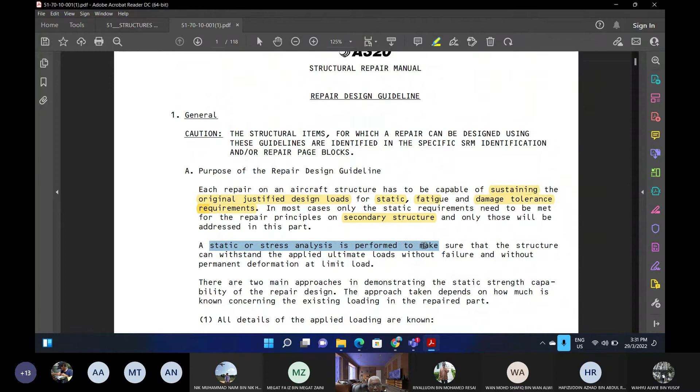A static or stress analysis is performed to make sure the structure can withstand the applied ultimate load without failure, without permanent deformation at the limit load. So first, you are required to do static stress analysis. That's why you cannot run away from it. That's why I'm trying to teach you, to give you as much information as possible, for you to have the skill or competency to do the static stress analysis, because that is required.

In fact, this is written in the manual - you have to do static or stress analysis. So that is the knowledge I'm trying to impart on you, for you to be able to do this static stress analysis.

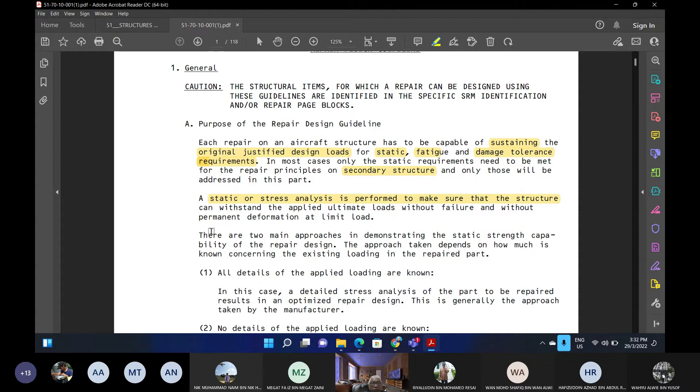There are two main approaches in demonstrating the static strength, two ways to do it. Let's go straight to the second one - this is what we call reverse engineering. Most of the time we do reverse engineering, that's the second method. The first method is where you have access to the OEM, and you have all the information on the load that goes through each structure. Then you are doing the first approach.

Meaning detail of the applied loads are known. You know how many Newtons go through each member - the skin, the stiffener, the bulkhead, the frame - in fact, every fastener, you also know the load. So the loading is known.

In this case, detailed stress analysis of the part to be repaired results in an optimized repair design. Because you know the load, you're not guessing - you know exactly what goes into that, and then your repair ends up being optimized.

Generally, this approach is taken by the manufacturer. You are at the level of manufacturer, because the manufacturer will have what they call a stress manual, and that stress manual will give all the detail about each structure - loads, stress, factor of safety, margin of safety.

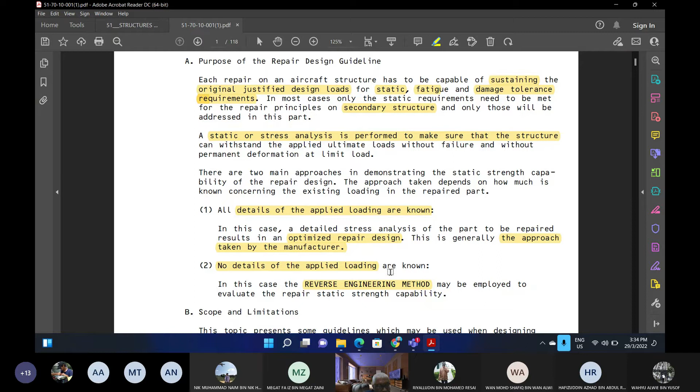Most of the time, there's no detail of the applied load. We do not know. We just look at the aircraft, we just look at the structure. We have no idea what the load is that's going through the structure. That happens all the time when we operate or own the aircraft. We were not the OEM, we have no access to the OEM. OEM will give you access to the structure repair manual, but they don't give you access to the stress manual.

Unless you're a very big airline, for example a big airline in the US like American Airlines, with thousands of aircraft, then they may have access. The OEM will share that information because they have too many people to handle, so they let the airline work on themselves and give them the information.

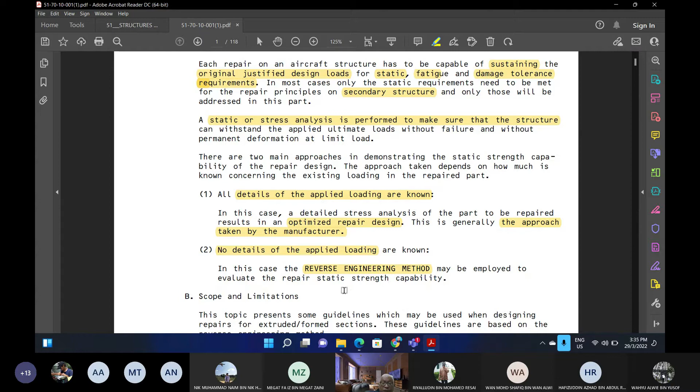So we do reverse engineering. We do not have the load, so we have to do reverse engineering. We will talk about it later.

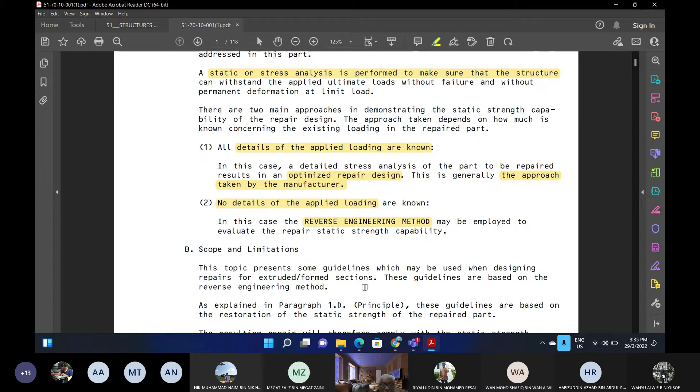Scope and limitation: this topic presents guidelines for designing repairs for extruded and formed sections. The guidelines are based on the reverse engineering method. This will explain how to do repair on extrusion or formed sections, not just skin sections, completely. Remember, aircraft structure is very simple.

Either you have skin or you have angle. Skin and angle put together can become a spar, a frame, or a bulkhead. That's how simple the concept is. So structure repair design can also be very simple: either a doubler or patch for the skin, and a splice doubler for the extrusion and form section.

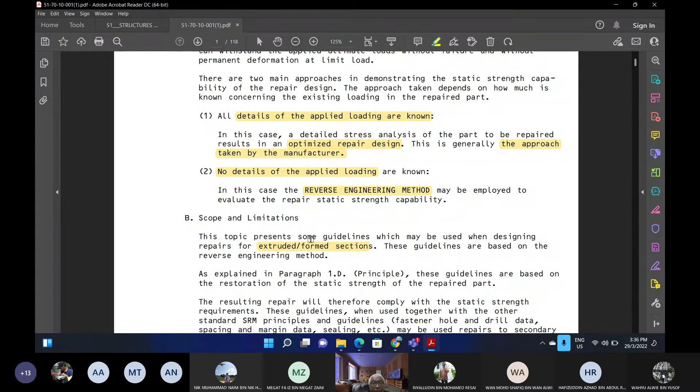The repair is meant to restore static strength. The resulting repair should therefore comply with the static strength requirement. This guideline, when used together with other standard SRM principles and guidelines for fastener holes, drill data, spacing, margin, and sealing, may be used to repair secondary structure without referring back to Airbus.

So you use this guideline coupled with other manuals for each task - drilling, installing fasteners, margins of safety, margin data, sealing, all the details you follow. This guideline plus that information together becomes the engineering order to repair, and that can be approved on secondary structure without going back to Airbus.

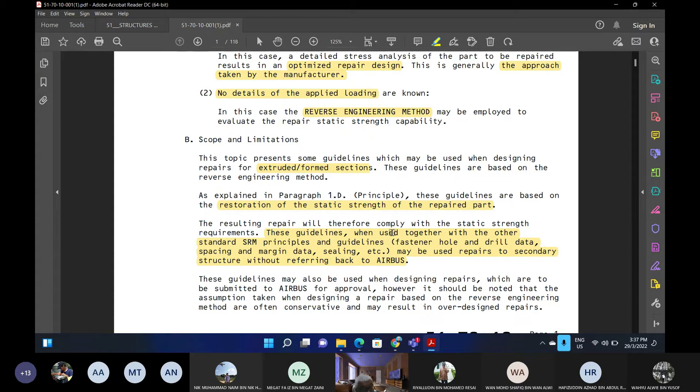In Malaysia, the CA will give you approval to do this. You'll be Part 21 Sub Part J, Design Organization Approval, and you'll have this approval to approve your own repair design on secondary structure. So you don't have to go back to the OEM, you don't need to wait for them to send out that repair approval.

This guideline is also used when designing repairs that are to be submitted to Airbus. If you submit to Airbus for them to assess your repair, for them to be able to review the repair easily - because you already used the principles they put in - you will have less time for them to approve your repair proposal.

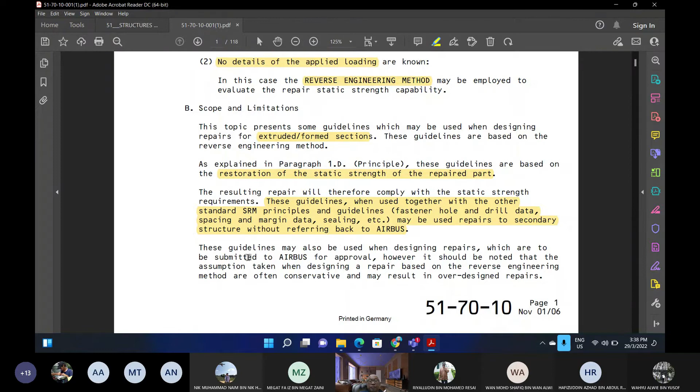Any question? So far no, sir. Okay.

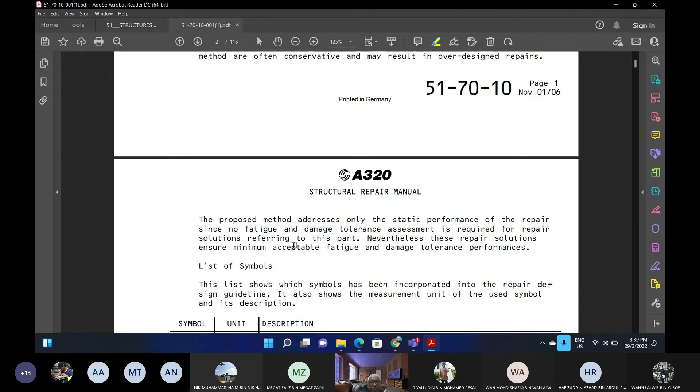Even though they are not focused on fatigue and damage tolerance, more focused on static, the general guideline of cutting, drilling, machining - all that methodology for you to make doublers, to make fillers, to cut the damage area - you have to follow this manual. This manual already has built-in damage, fatigue, and damage tolerant principles in that kind of activity.

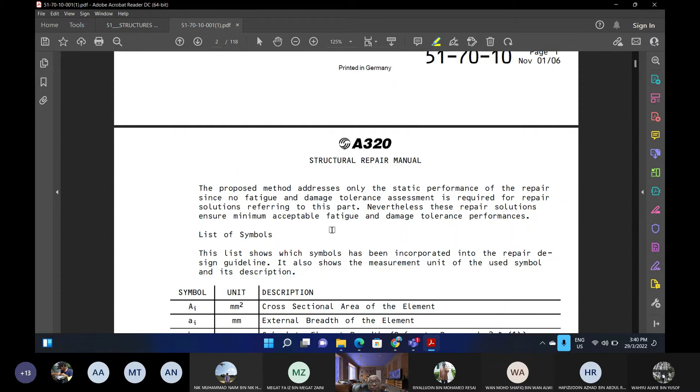That's why we have shot peening, heat treatment, hydrogen embrittlement. Those are elements for you not to fail prematurely because of fatigue and damage tolerance. And then next you can see the list of symbols.

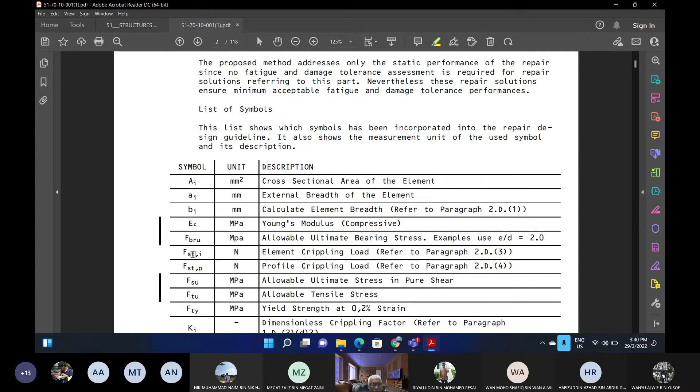This is engineering properties, material values. We have to see here FBRU, FST, FSU, FTU, FTY. This is something you always see when you do mechanical material, so this appears again - like I said, you cannot forget them.

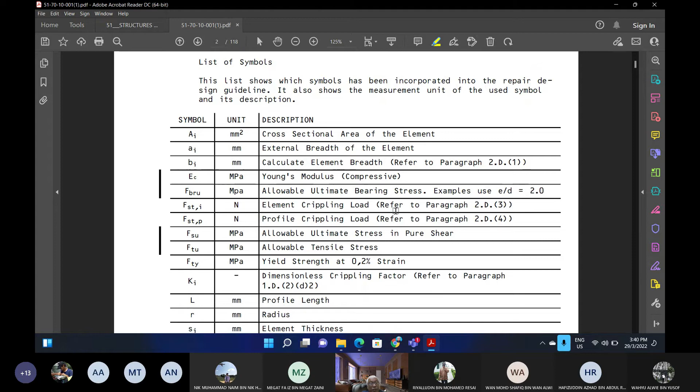You will see this again in this manual. So whoever is now doing mechanical material - I think it's too late for some of you - hopefully you'll be motivated seeing this, because whatever you do actually appears in the aircraft manual.

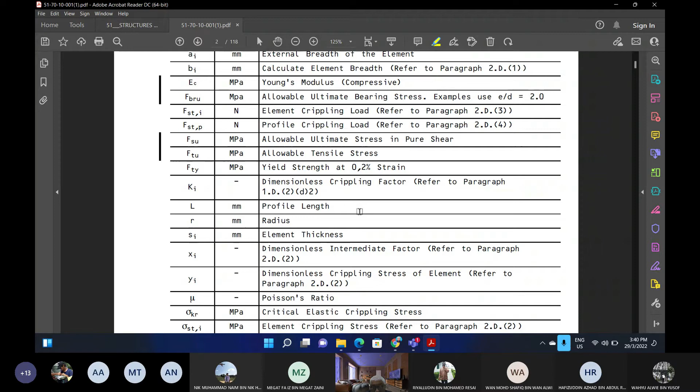And then there's a term here, factor of safety. We have reserve factor, we have margin of safety. Factor of safety is purely for certification. Any primary structure should have a 1.5 factor of safety, meaning 50% extra in terms of strength. So if you design something to 150 Newton, you only apply 100 Newton, you have 50 Newton extra margin. That margin will be able to handle errors, environmental issues, or any overload or unexpected operational load.

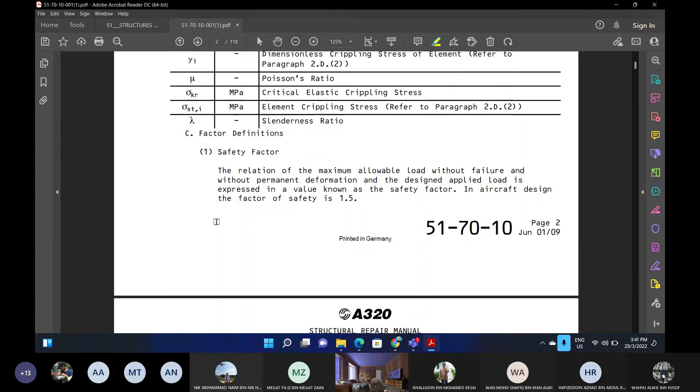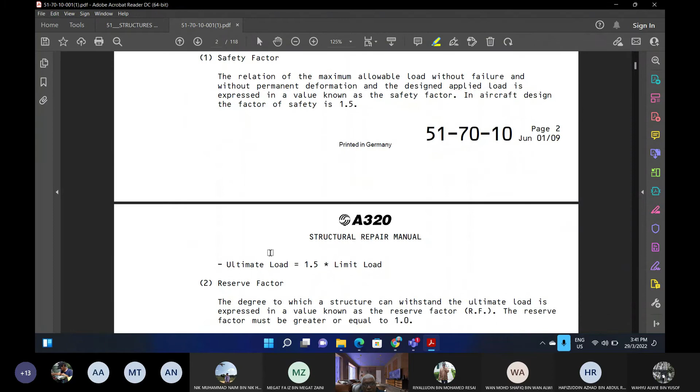Then there's another term, we call it reserve factor. Reserve factor is the allowable load divided by the applied load. So if the allowable load is 150 and the applied load is 100, you have a reserve factor of more than one.

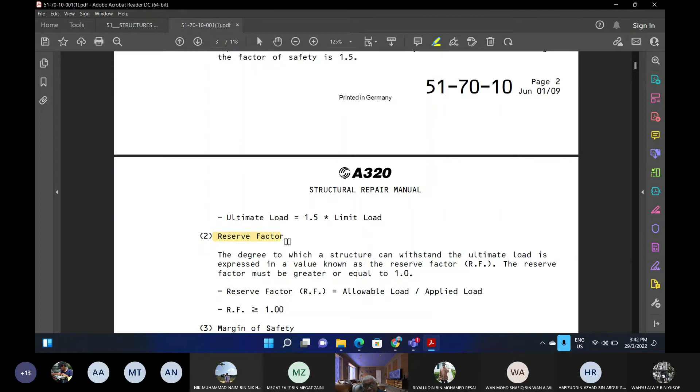So you may only work on a primary structure to require 1.5. For secondary structure, fairing is something not critical. You may use less than 1.5. So if you say your allowable load you design to 110, you apply at 100, so 110 over 100, you got 1.1. So it's more than 1, so it's acceptable. Should not be less than 1. That is reserve factor. Means you still have some reserve load in the structure.

Margin of safety is reserve factor minus 1. Should be more than 0. So say you have 110 as allowable load, apply at 100, you got 1.1. You minus 1, you got 0.1, so still okay because it's positive. It's higher than 0. So it's three terms always been used.

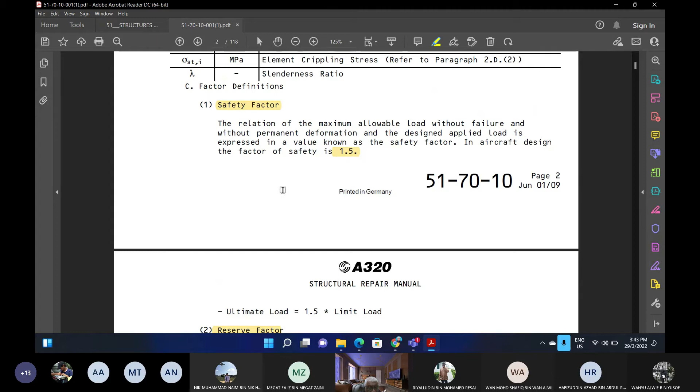And first term is regulatory term. So this is used when you want to do certification. You must have the factor 1.5, especially for the primary structure. Okay. Any questions so far?

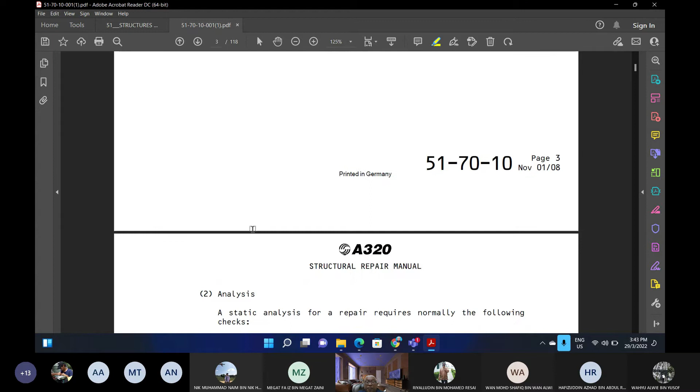Okay, next: repair material and dimension. In order to restore, remember, repair, restore. A basic principle when reinforcing and splicing is to use the same, remember, same material as the original. First rule. So if your original material is 2024 T3, your doubler should be 2024 T3.

Okay. General principle. If you are unable to get the doubler, you go back to the manual, you look for substitution. What can you substitute? What are the materials to substitute 2024 T3? If not there, then you have to use reverse engineering, and then you have to justify. If you have everything in the table from the manual, you don't have to justify. You just refer to the manual. If not, then you have to justify yourself.

The worst, you may be required to do testing. So that's why most of the time we just follow the manual. We just follow what are the allowable substitutions, so easier for us. So same material. Yeah. Then thickness of the repair part shall ensure the cross-section area of the repair restores the original cross-section area. Okay. Shall be ensured.

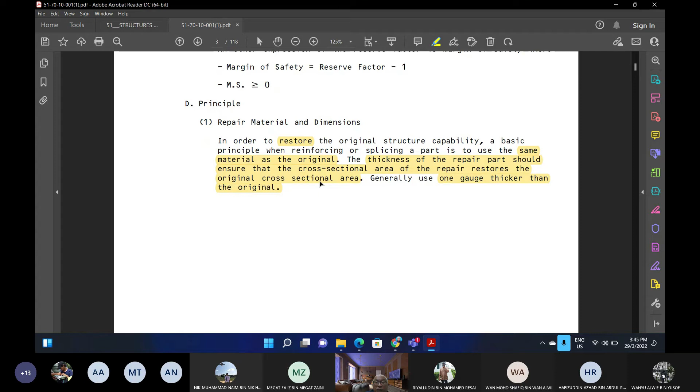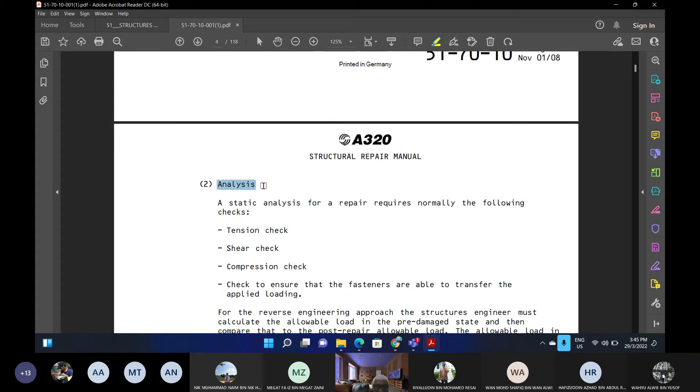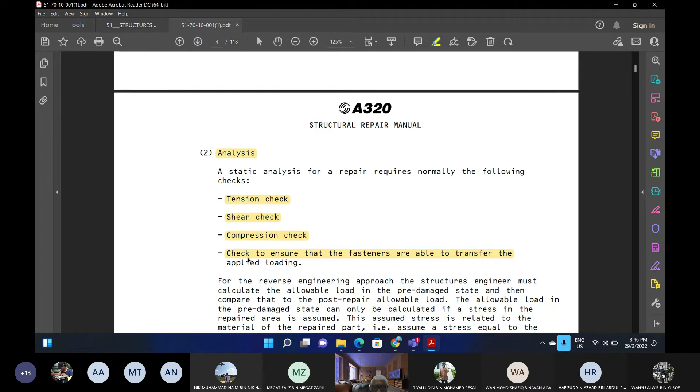Always think of that. However, we cannot just let it loose. We have to do the check. That's why analysis has to be done. Analysis for repair requires the following checks: tension check, net tension failure, shear check, shear out, shear failure, compression check, bearing. Check to ensure fasteners are able to transfer the applied load. Also, you need to check whether you use appropriate fasteners or not. Okay, that is analysis to be done.

Maybe 2 minutes. Okay, let's continue. Okay, now what is next?

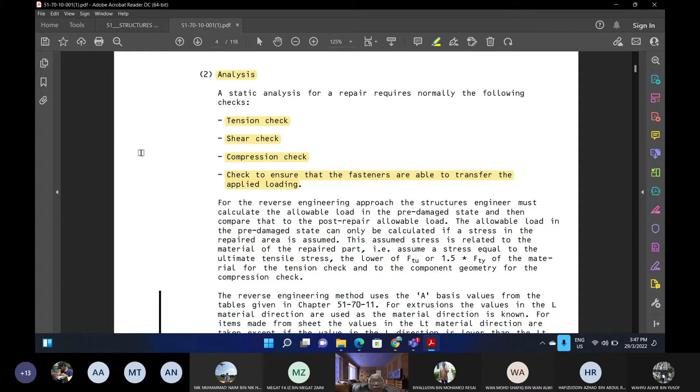Okay, how do we do it? For the reverse engineering approach, structure engineer, you are structure engineer. Okay, so if you talk to Airbus, you apply for structure engineer. Must calculate allowable load in the pre-damage state. Calculate allowable load in the pre-damage state. And then compare to the post-repair allowable load.

Allowable load, not limit load. Allowable load, maximum load. And then you compare allowable load before damage, and then allowable load when you already have installed the doubler. Okay. So you can calculate the load only if the stress in the repair is assumed. So how to assume it? How to assume the stress?

You must know the material. And then with the material, you go to the table and you determine what is the stress for that kind of material, for the thickness, for the direction of the grain of the material, and then for primary structure, secondary structure. Then you have to select what is the most suitable stress.

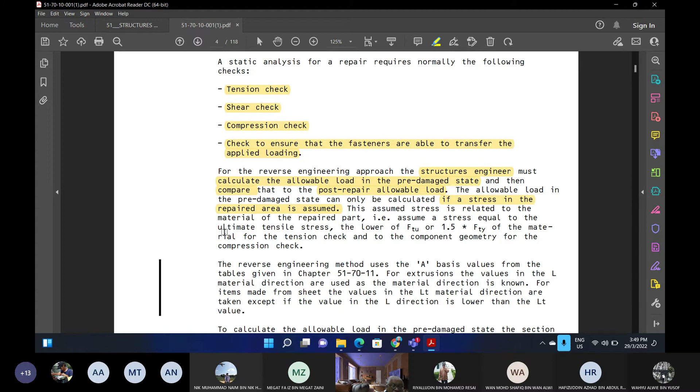That stress, you times the cross-sectional area of the damage, then you will get load. So that's the load lost. And also you can calculate for the doubler material. You take the stress, times the cross-section, which is the thickness of the doubler, and that is the load that the doubler can take. So the load of the doubler over the load of the original, and then you will get the margin of safety factor.

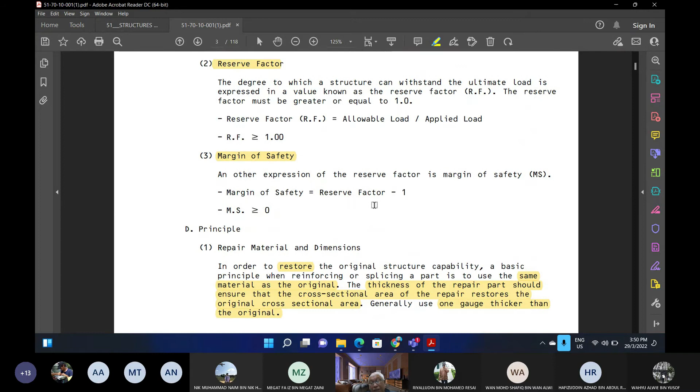Sorry, what do you get? You got 3 items I was discussing with you. You will get reserve factor. Sorry. And then reserve factor should be more than 1. Okay, clear?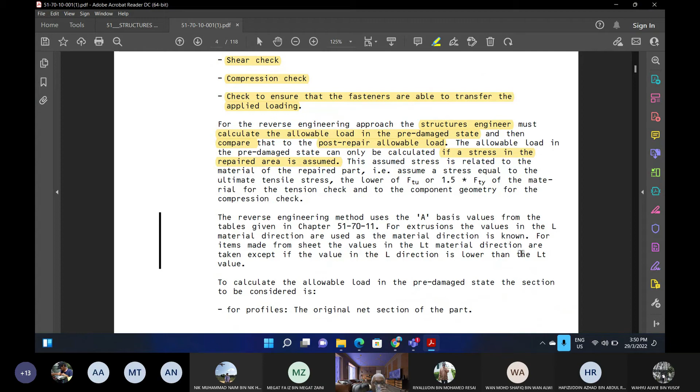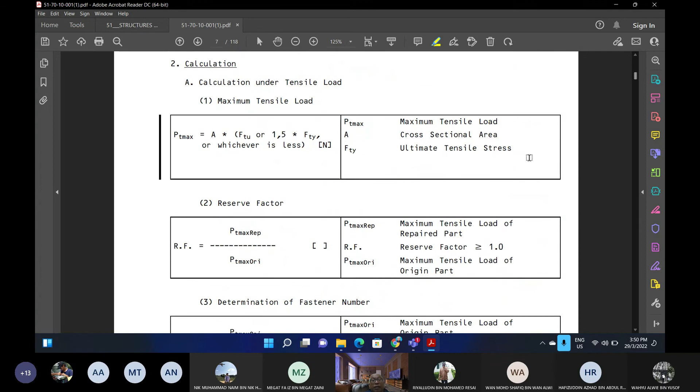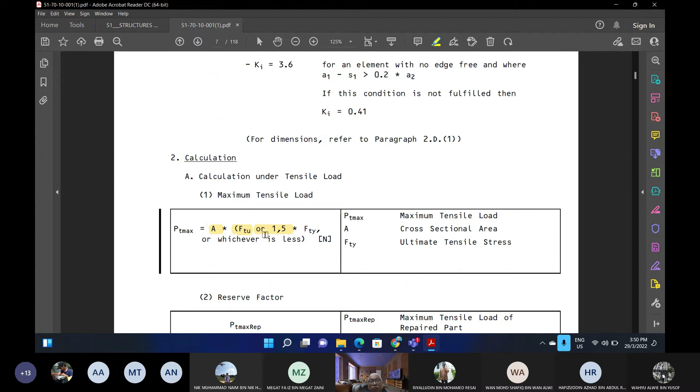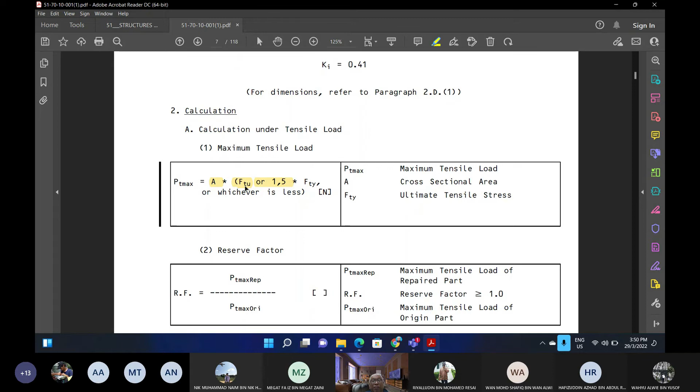Okay, let's go into detail later. Let's browse through this. Okay. So check. This equation is given for how to calculate cross-sectional area over the stress. I will explain to you later on the FTU or 1.5 times FTY. However, what I'm trying to say to you, for the load, you have to multiply cross-sectional area with the stress of the material. So it's given here.

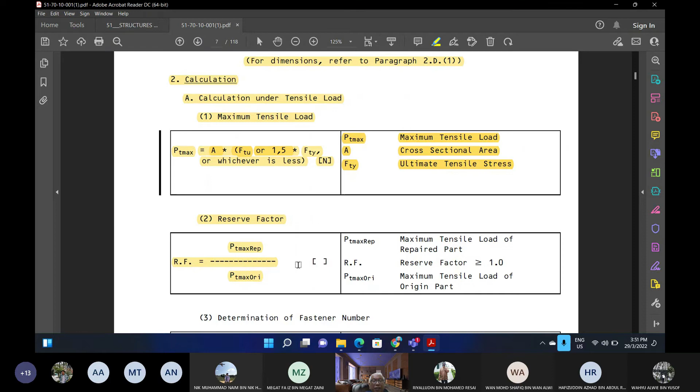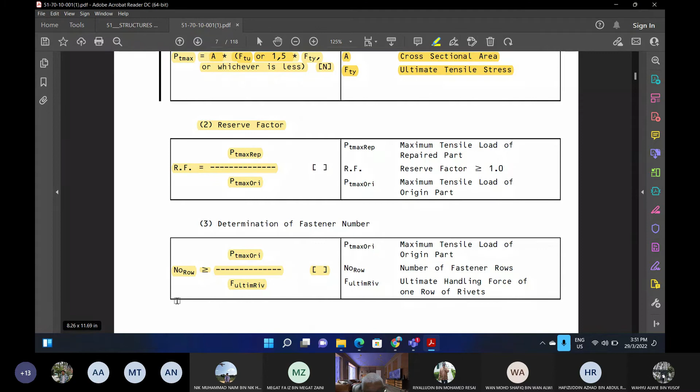And then from there, you calculate the reserve factor. Okay. And then next, you determine the number of fasteners. So for the number of fasteners here, the maximum load on the original divided by the strength of the fastener, and then you will get the number of fasteners. For example, if your original skin load is say 100 Newton, then you choose a fastener of 50 Newton each. So 100 divided by 50, you got 2. You need 2 fasteners to transfer the load each side.

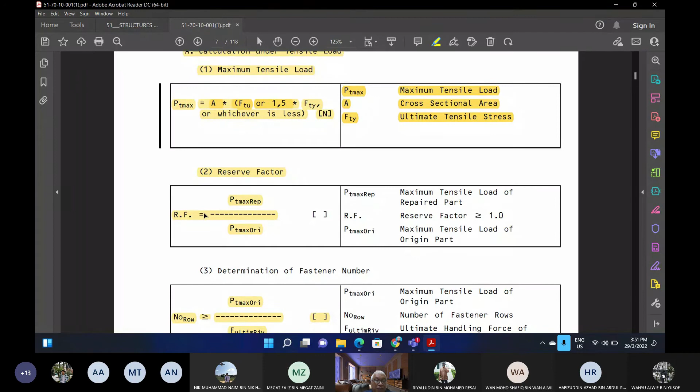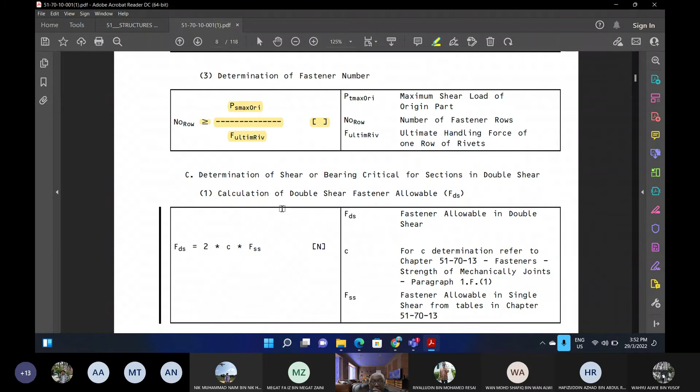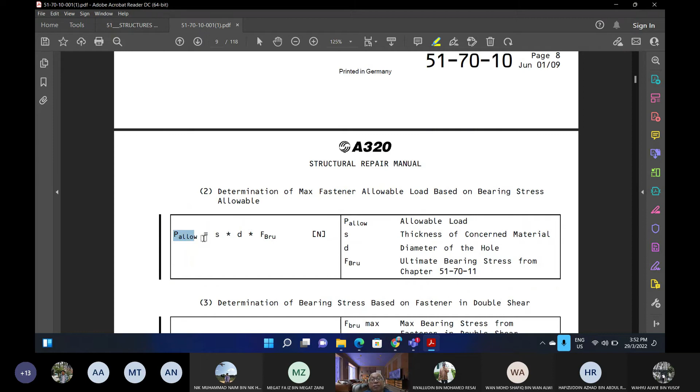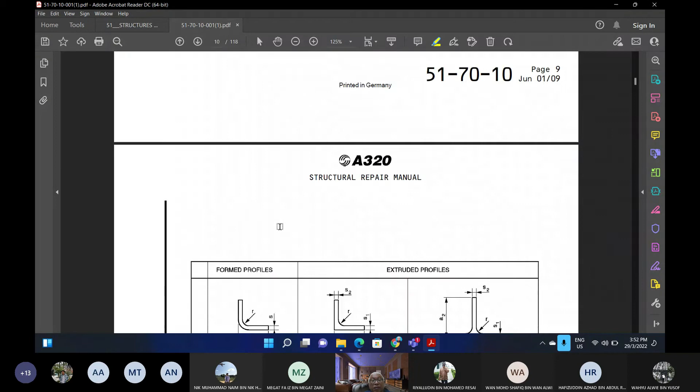So 3 things. Calculate the load, calculate reserve factor, determine the fastener row, and then determine the maximum shear for the fastener, and then reserve factor again, number of fasteners based on shear, and then you calculate whether it is single shear or double shear. So you need to consider how many layers of doubler that you put in. And then you check bearing stress. Okay, after you check the bearing stress, you may want to look at also the crippling, buckling, and so on.

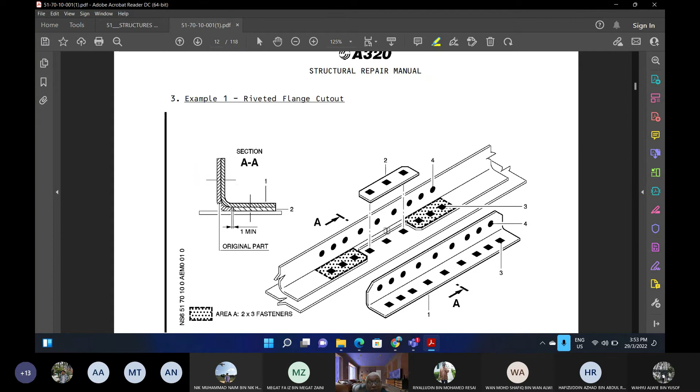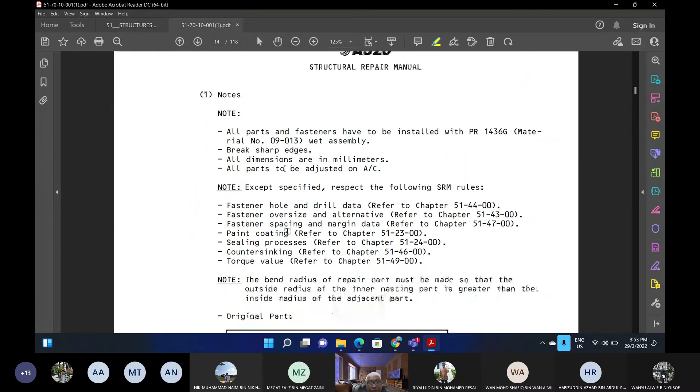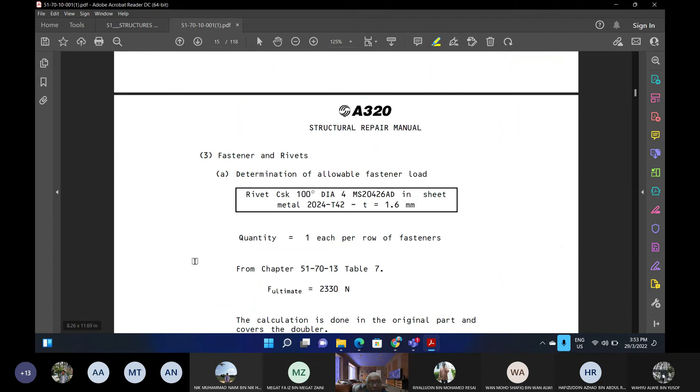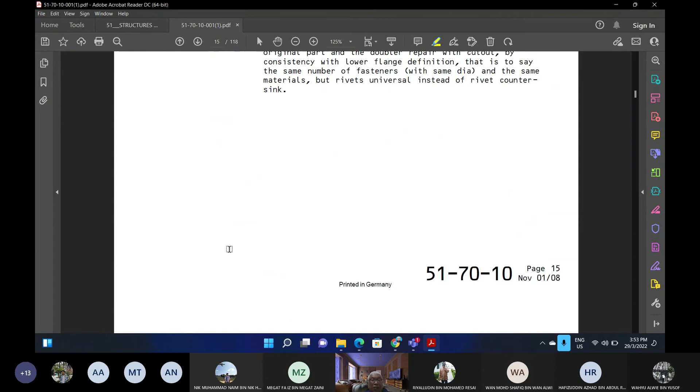Then there are 11 of these examples of repair. For this case, you have a defect on this horizontal flange, cut it off, put a filler, put a doubler, and then the process takes place here. You need to calculate the load on the original, load on the doubler, and then you calculate reserve factor, and then you calculate the number of fasteners, and you calculate the bearing. So you have to do the shear out, net tension failure. Those are standard checks. We will go through detail later, but I just try to walk through the manual. That's what you get. So we have 11 of these.

So for your repair proposal, you may want to see any of these 11. You can choose one of them as your concept repair for the assignment. But most of the time, your assignment for the skin will be using either example number 10 or 11, because examples 10 and 11 talk about skin. And most of it will be from 1 to 9 because those are angles. So you have to use the appropriate angle repair.

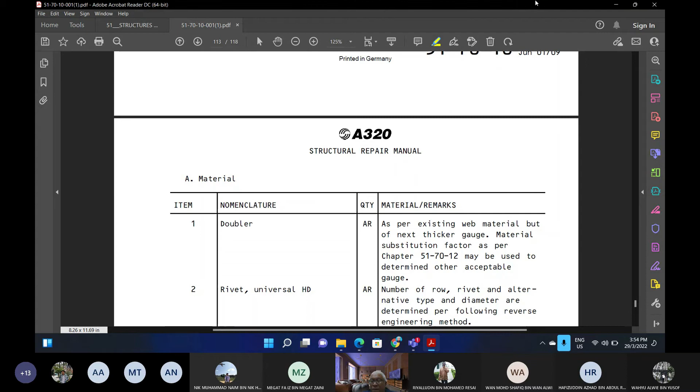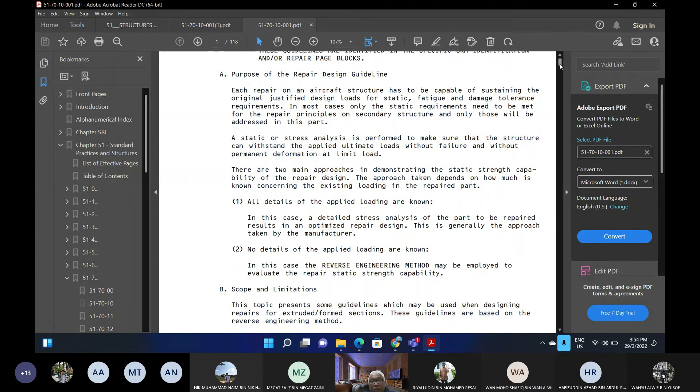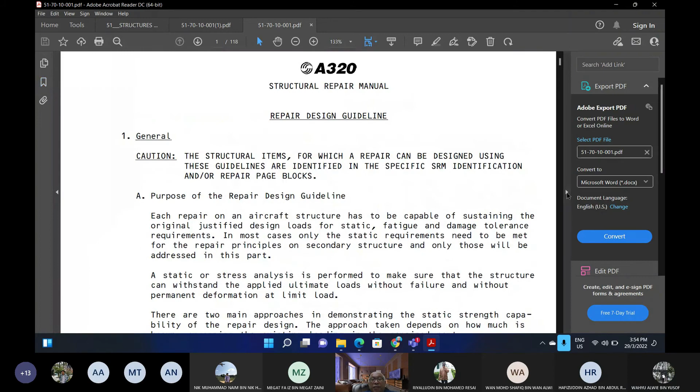Any questions so far? No? Next one. There's another manual associated to that. We have 51. Are you seeing my page? Yes, sir. So this is 51, 70, 10. Okay, sorry, this is the old one. The next one is 51, 70, 11.

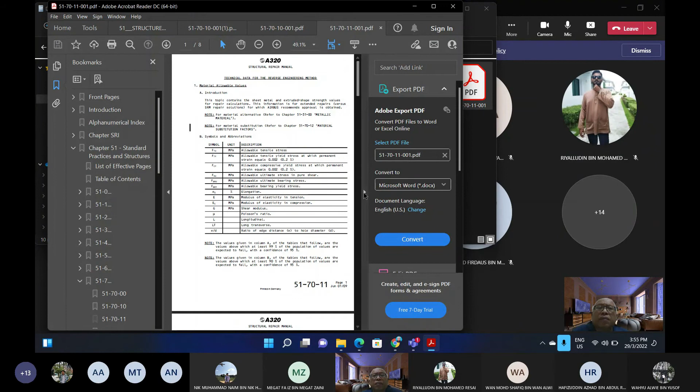Okay, so this is technical data for the reverse engineering method. Remember, our repair method is the reverse engineering method. Why reverse? Because we do not have the load on the structure. We calculate the load by assuming the damaged area will be the load that you need to use in the design detail of the repair.

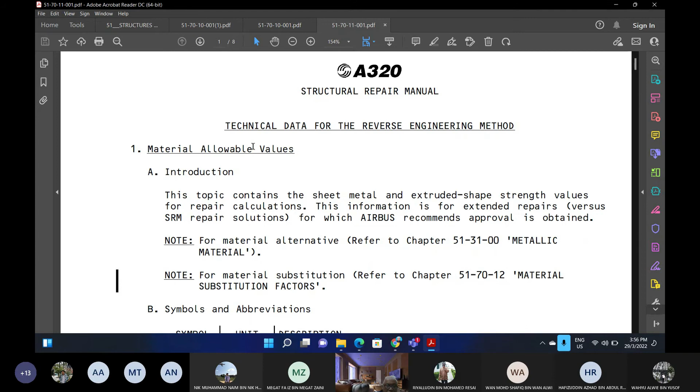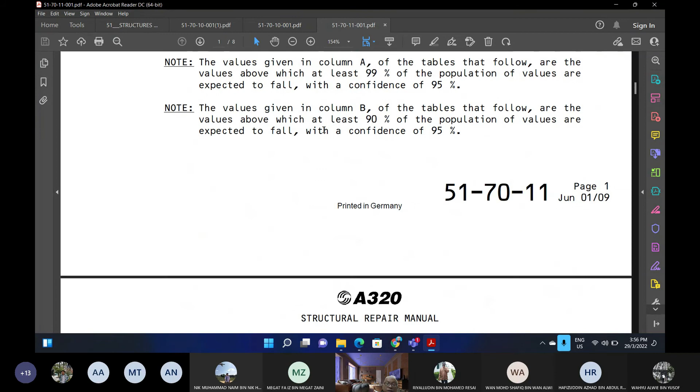Okay, material allowable value, technical data for reverse engineering. For this material allowable, you can see the same symbols come again. So go back to your mechanics of materials and try to understand all these symbols. And most importantly, it also lists the material: sheet, plate, clad, extruded, so 2024, 7075, tempering, extruded 7075, 7175. And then the sheet metal, if the repair is too thick and you want to make it thinner, you use steel AISI 301, but you have to treat the stainless steel with cadmium plating, so you will not get corrosion due to the contact with aluminium.

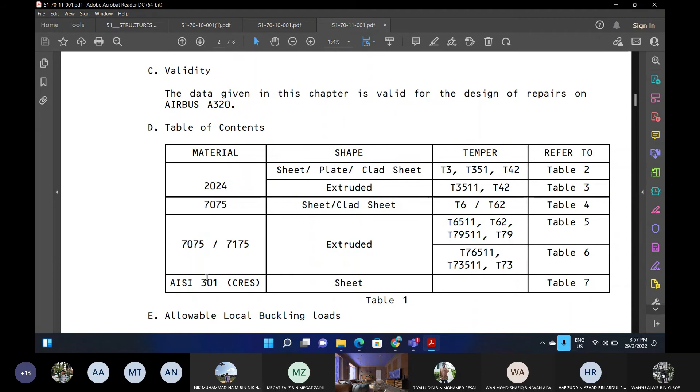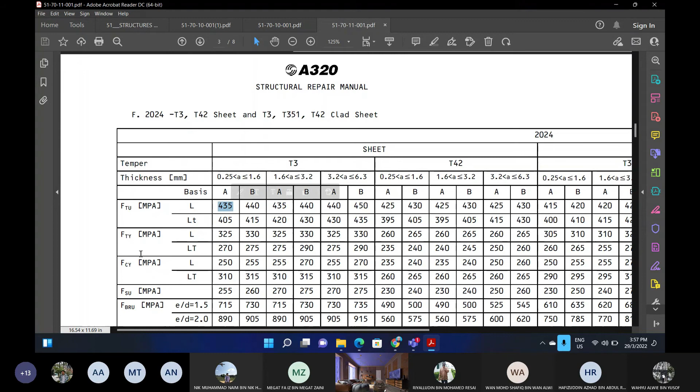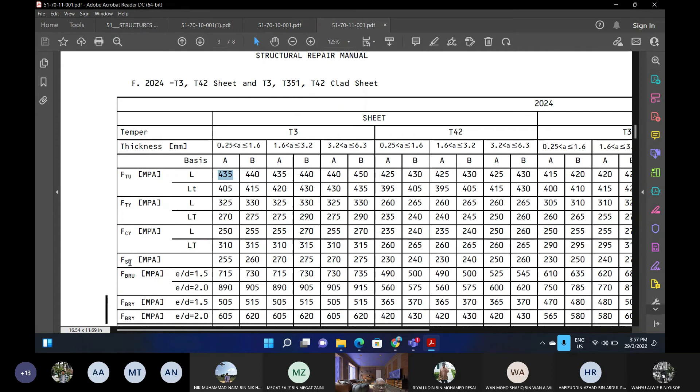So what you need to understand here, this manual gives you a table. This table here is where you select your material strength. You can see there are many tables. I'm showing you 2024-T3. So look at temper T3. If you want to work on 2024-T3 sheet metal, and your thickness is say 1 mm, it should be between 0.25 to 1.6. And then you choose this value here in megapascal. So this is tensile ultimate. You also get tensile yield, compression yield, shear ultimate, bearing ultimate, bearing yield. So all given here.

So what I want to show you, there are two things here. There are boxes here: 435, 440, 405, 415. Which one do you choose? If the repair is small and the weight is not significant, we use the worst one, 405. So we become very conservative. We can say that the strength of the material that you want to put as a doubler is only 405. Not an issue if the repair is small and weight is not a main issue, because with 405 you need a thicker plate. If you use 440, then you will use less, because 440 is stronger than 405. That is the reason why.

However, you need to understand what A and B are. For A, when they did the test, say we have 100 coupons, 99 coupons will give the value 435. Meaning 99 coupons failed at 435.

Whereas 90 coupons failed at 440. So 435 is more confident because 99% result with 435. So that's the explanation of A and B. For A, the probability is highest for the value 435, and 90% for 440. Why do we need these two?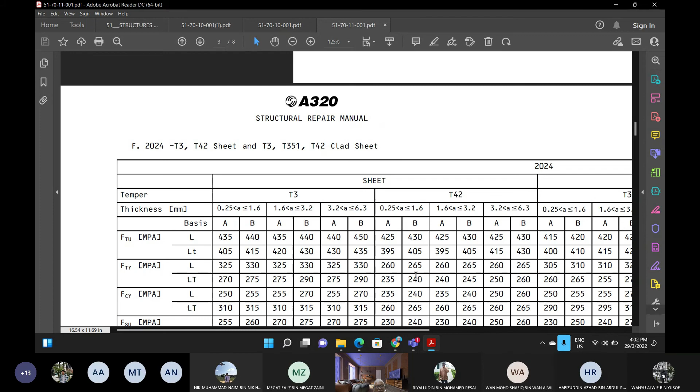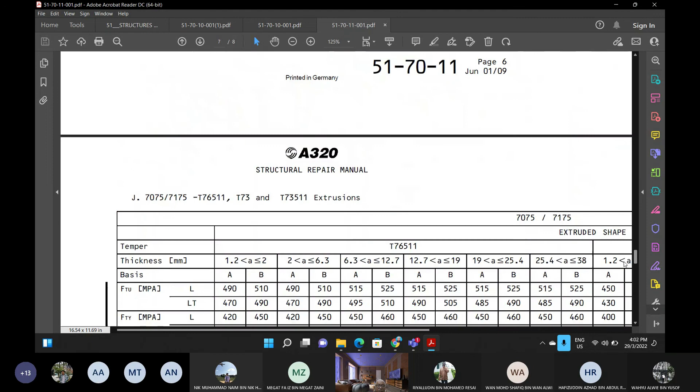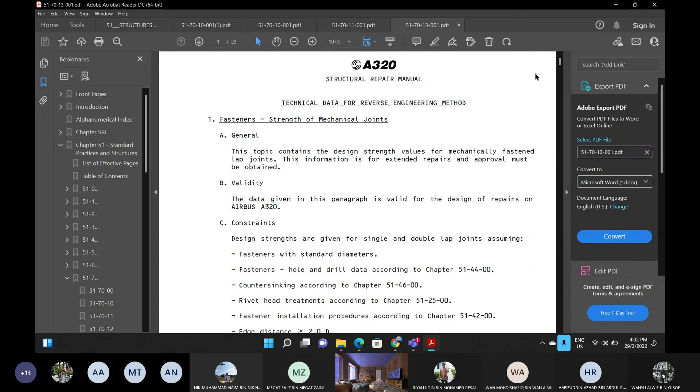Any questions so far? Okay, there's a lot more material here. In fact, they have given information up to stainless steel. Okay, next I will show you, still in the technical data for reverse engineering methods, fasteners. And here it gives you all the detail about fastener load and fastener strength capability.

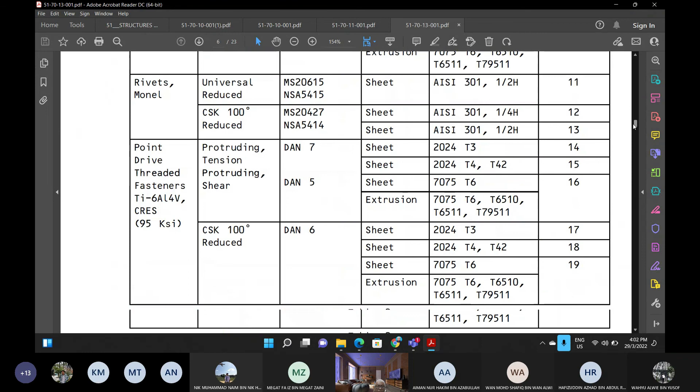Okay, for example, this table here, MS20470, 2024, that's the material. This is a fastener. MS20470 is the most commonly used rivet, MS20470 solid rivet, universal head, in sheet 2024 clad, for bearing. So for the rivet in the 2024 sheet, this is the strength for AD, DD, KE. I think you learned already what AD and DD are. The rivet type with material 2117 is AD, 2024 is DD.

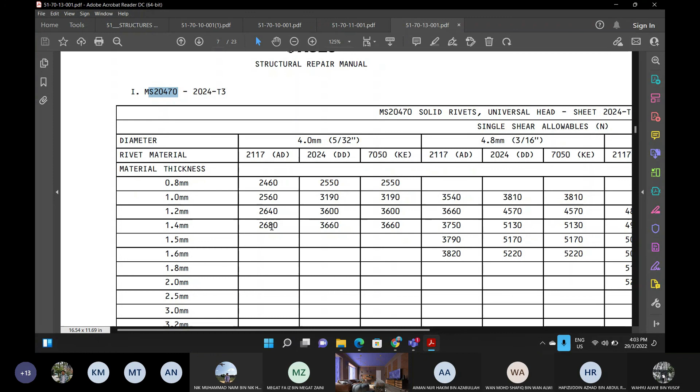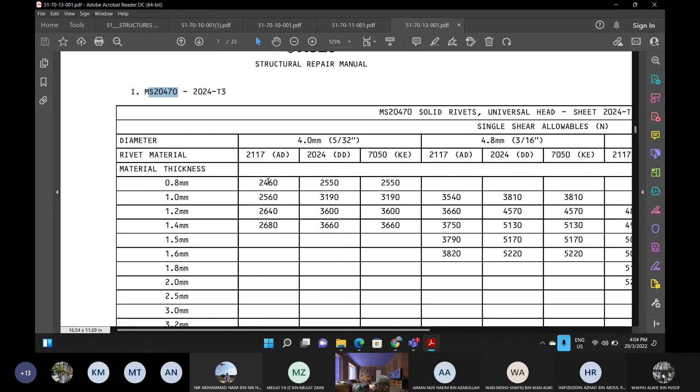So for each thickness, that is the strength for the rivets. So 4 mm rivets, AD rivets: if you are working on 1.4 mm thick material, you'll consider a load of only 2680. And if you're working on 0.8, very thin material, you only consider 2460. If you go higher than this, the skin already fails. So it's not the actual shear strength of the rivet, it's a failure of the joint, the failure of the skin. The actual strength is 2680. For this sample here, DD, actual rivet shear is 3660, the maximum single shear.

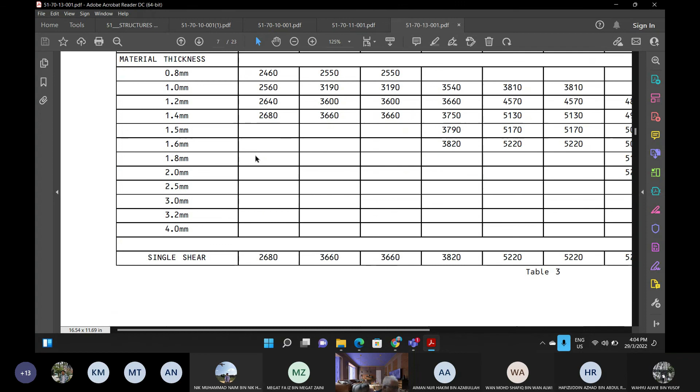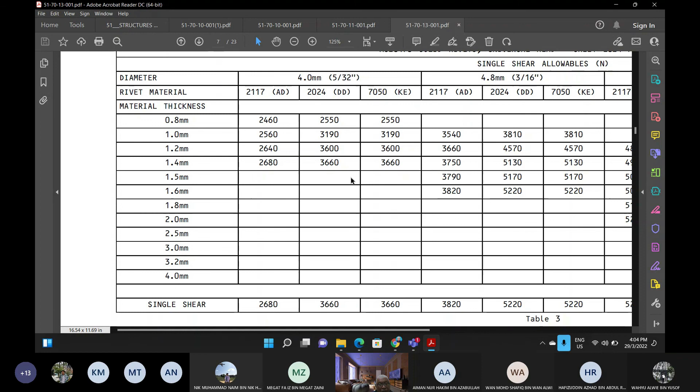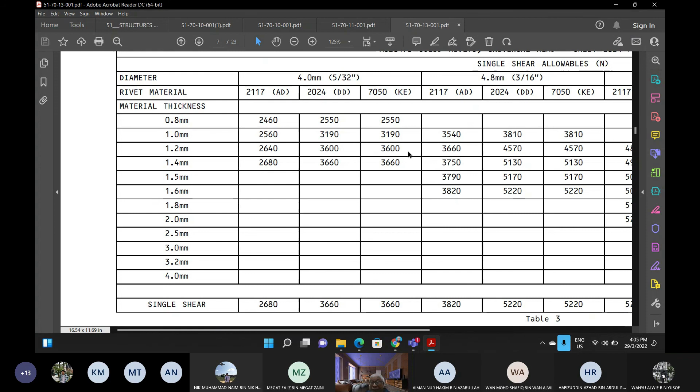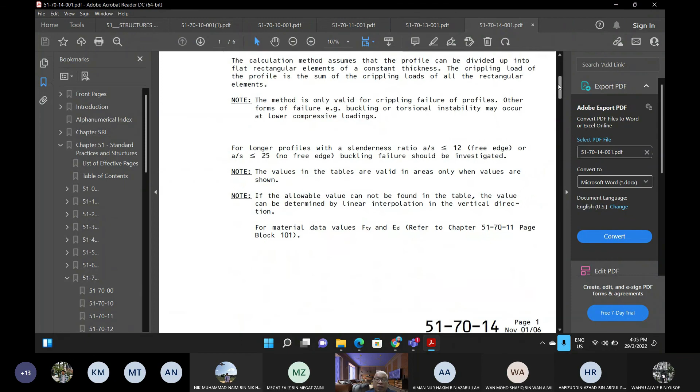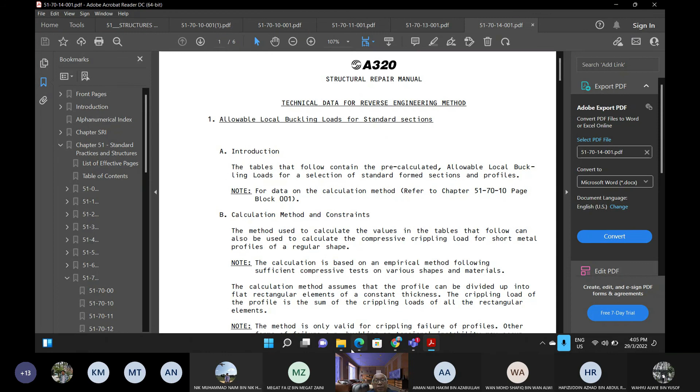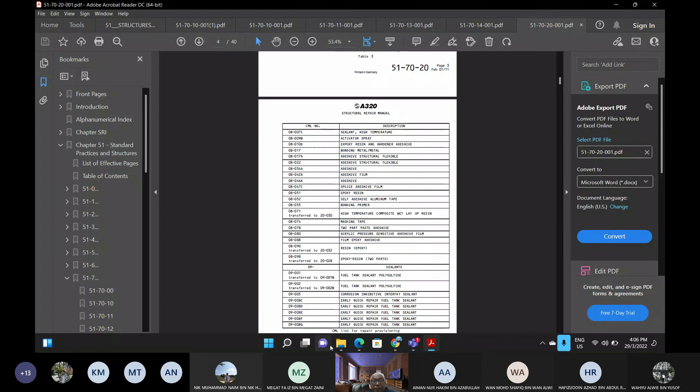So next is the manual technical data for reverse engineering, allowable local buckling load for standard sections. So here we calculate buckling and crippling. I will go through that later. We want to make sure the repair that you introduce does not fail in buckling and crippling. So this analysis of 51-70-14 will give you the detailed analysis of buckling. And then we have another repair general guideline. Okay, there's only 4. So we will work on 51-70-10, 5111, 517011, 517013, 517014.